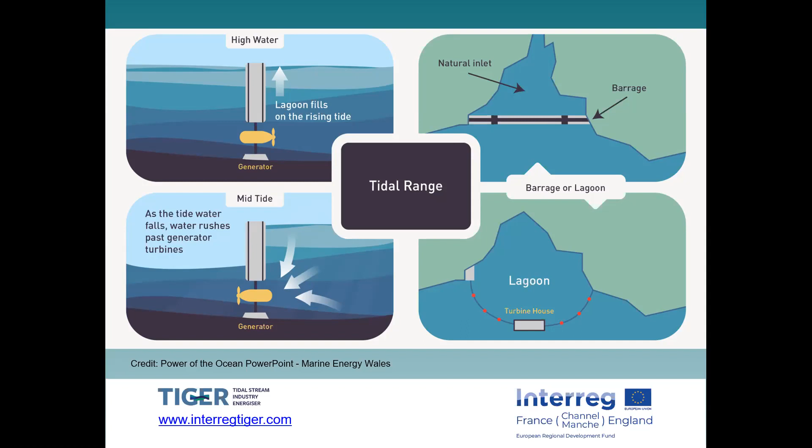So I don't think, given present company, that I need to explain the concept of tides to you. But what I did want to do was just touch on what distinguishes tidal stream from tidal range. As you may be aware, tidal range focuses on the difference between high and low water. You've got technologies such as lagoons and barrages. Examples in the UK being Swansea Lagoon and the Severn Barrage, neither of which went ahead. But they rely on the difference between high water and low water. That's not what we're looking at through Tiger. What we're looking at through Tiger is tidal stream.

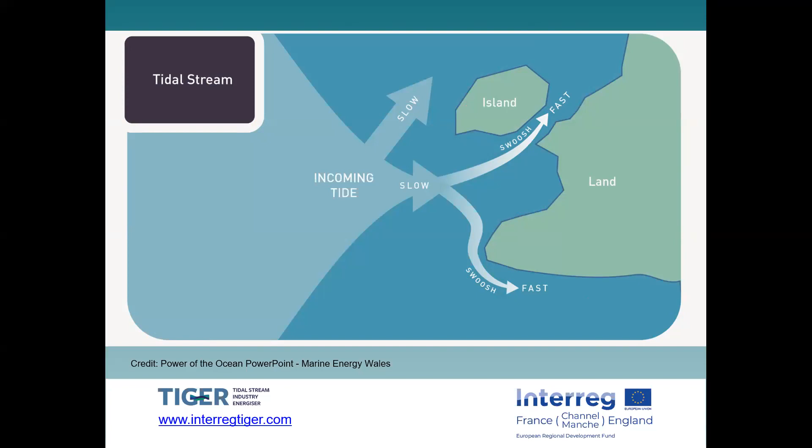As part of Tiger, we wanted to incorporate as many different technologies as possible. That's what we're all about. And tidal being what it is and where the industry is, there's not one single sort of tidal turbine design. There's a few different designs floating around.

On the left there, you can see the concept of a kind of moored floating tidal device. So examples of those would be Magallanes or Orbital, being a partner in Tiger. On the right there, you've got a kind of more traditional wind turbine style tidal turbine, so fixed to the bottom either by piling or gravity anchors. And an example of that would be Simec Atlantis, who are again a partner in Tiger.

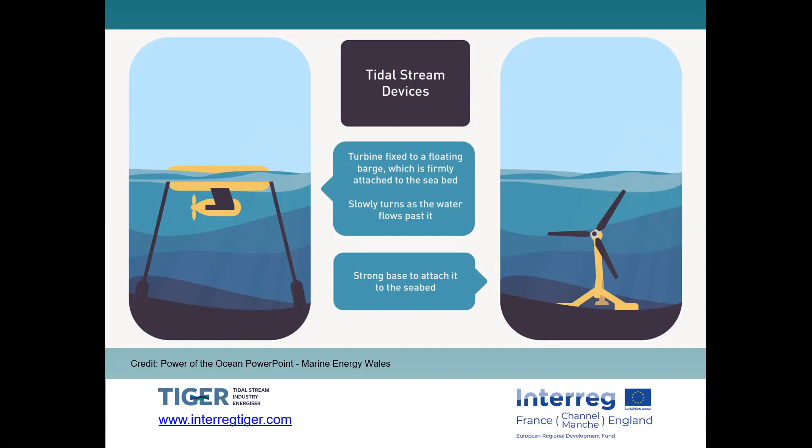And there is a third concept that we're considering, which is the mid-water column tidal kites, which you may have seen, specifically Minesto, Swedish company, also a partner in Tiger. And their device sits some way between the surface and the seabed, and is tethered to the seabed. And it flies in a sort of figure of eight formation, much the same as if you're flying a kite on the beach, and in doing so, it drags a turbine through the tidal flow and generates energy that way.

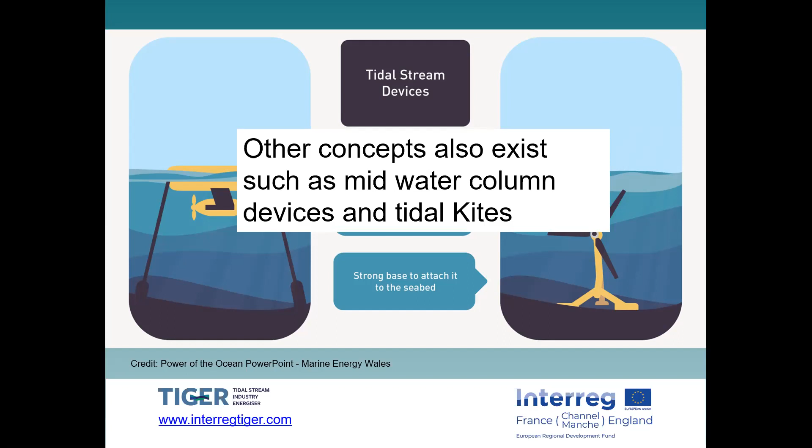So as I said before, Tiger is all about accelerating deployment of tidal stream in the UK and France. And one of the key barriers to deployment at the moment is just the cost, the levelized cost of energy of tidal stream when compared with certainly fixed bottom offshore wind, or the really advanced technologies such as onshore wind and solar. It's just not quite competitive yet. It hasn't benefited from the same government support in the past. So what we're trying to do through Tiger is substantiate some claims that the Catapult made in our 2018 Wave and Tidal Cost Reduction Report.

As you can see in front of you here, there's the current state of the art with 10 megawatts installed as we currently do. We're looking at about £300 per megawatt hour installed. As you come down the cost curve, additional deployment towards 200 megawatts deployed, you reduce costs through learning by doing, you reduce the cost of capital. By the time you're up at 200 megawatts installed, you're looking somewhere in the region of £100 to £150 per megawatt hour. Going further, moving towards 1 gigawatt installed, again, accessing lower cost debt finance, learning by doing. And the hope is that you'll be somewhere around £90 to £100 per megawatt hour installed.

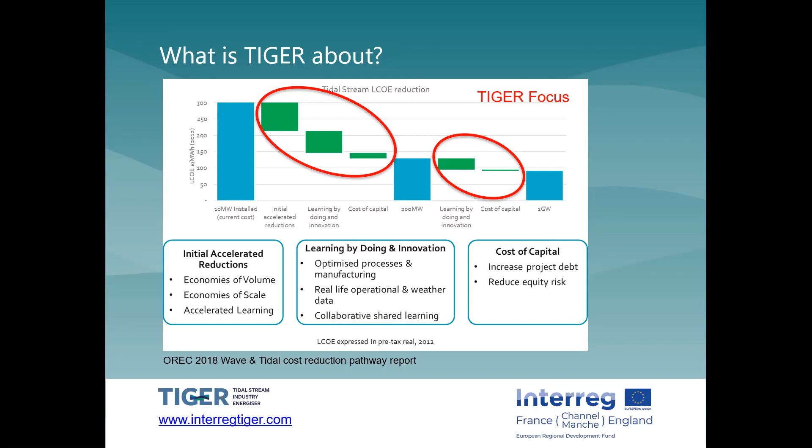So these were claims made in our 2018 report, but they were based on theory. So what we really want to do is put some points under this curve and really prove it in a real seas environment. So through Tiger, we're going to consent new sites. We're going to get some devices in the water in the UK and France, and we're going to analyze all that, put it together, and translate that into some kind of cost reduction figures in a format that can be put in front of policymakers to really prove the point that tidal is ready for a subsidy and can be cost competitive. It just needs that initial kickstart that those other technologies had.

So I touched on it just then, but how we're going to do that. As I said before, we're going to be getting devices in the water. We're going to be looking at technology, and then we're going to be putting it all together. So Tiger is separated into 3 different work packages. Work package 1 is tidal energy site development and deployment. So that's the learning by doing stuff. So getting devices in the water, consenting new sites, understanding really how much does it cost to get these things in the water and operate them and also recover them.

Work package 2 is looking at the development of new technologies and products. So one of our deliverables through that work package is to come up with a range of 46 new products, systems and test specifications. And what we want to do is see how we can drive down costs by increasing commonality of components. So at the moment, developers are largely working in silos. They may well have similar problems, but they're not collaborating. They may well need similar components.

But they just don't know it yet. So the idea is to get them collaborating, identify areas of commonality, and hopefully allow them to access economies of scale, place larger orders, and obviously drive down costs that way.

And then work package 3 is cost reduction analysis. So that's where we're putting together all the data in work packages 1 and 2, and our in-house techno-economic analysts will pull that together and put that into some reports and some nice graphs that can be put in front of politicians and policymakers and say, look, tidal is ready. We're ready to go. We've got all these sites ready. The costs are competitive. We just need your initial support in favor of tidal stream.

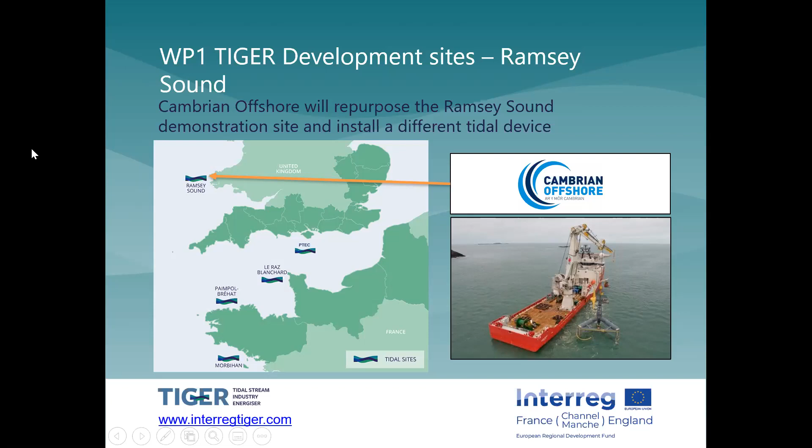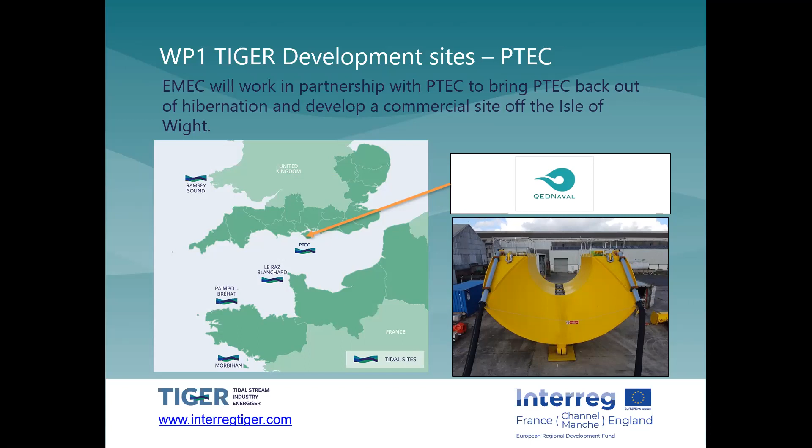And then finally down south in the Raz Blanchard, an area many of you may be familiar with due to its excellent tidal resource. I believe it's certainly the largest tidal resource in Europe. So SIMEC Atlantis and AD Normandie have formed a JV known as Normandie Hydroliennes, and they are looking to consent a new site in the Raz Blanchard. And the unique part of that project, they're actually looking to use the power to sell to the island of Alderney via a private PPA.

Many of you will be familiar with Alderney. Being a small island community, they rely heavily on diesel, and they're looking to do away with that reliance on diesel. And with this enormous tidal resource in their backyard, it makes perfect sense that they should look to tidal. Actually, Danny, who is going to follow on from me, is going to talk a lot more about the Alderney Race. And then the second partner that's looking at the Alderney Race is HydroQuest.

So HydroQuest are going to look to secure consent and develop a 10 megawatt commercial array, also in the Alderney Race. They're two slightly different sites, not far from each other, but they do share some aspects; their consent requires them to share a cable landing. Much of the onshore cable route has to be shared.

So it's really encouraging to see that HydroQuest and SIMEC Atlantis are actually starting to work in collaboration. Despite being competitors, they've realized that the best way to do this is to collaborate for the greater good. And that's really encouraging to see, because it's something that's new for the sector.

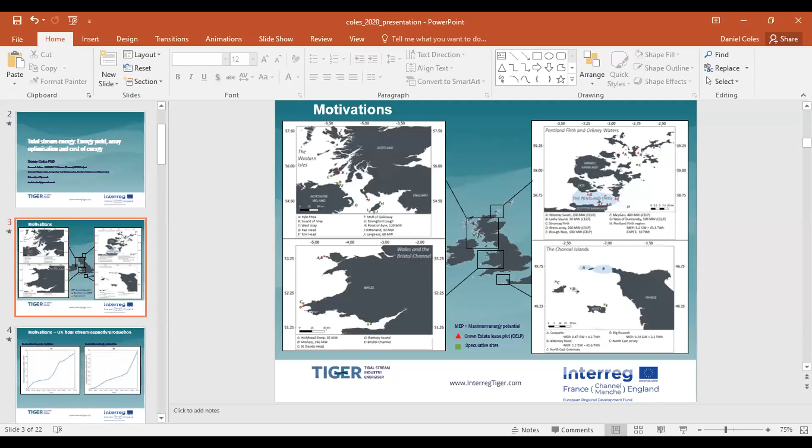Thank you. Okay, thanks very much, Robbie. So Danny will be up next. Robbie, you'll see there's a couple of questions have appeared in the chat. So maybe you could answer those through the chat box while Danny starts giving his talk. Okay. Thank you. Okay, over to you, Danny. Thanks, Steve. Thanks for having me along today. And thanks, Robbie. That was a good introduction.

Hi, everyone. Good afternoon. As Steve said, I'm a research fellow at Plymouth University working on the Tiger project. And today I'll be giving a presentation looking at the energy yield estimates and aspects of array optimization and also cost of energy and how that all feeds into the Tiger project.

So just to give a bit of background to start with, these maps here are highlighting some of the main regions of the UK where there is a tidal stream resource. There's a UK-wide study that was commissioned by the Carbon Trust that concluded that the UK practical resource for tidal stream energy is around 34 terawatt hours, which is equivalent to around 11% of the UK's electricity consumption over a year. And so we have a reasonable level of confidence that there's a significant resource out there that we can harness. And these maps are really trying to highlight that.

I won't be able to go into too much detail on an individual site level, but there are Crown Estate lease plots that have been allocated, especially in the Orkney Waters and Pentland Firth region of Scotland, on the west coast of Scotland and the UK as well. Also got Wales, Anglesey and Ramsey Sound. And then also the Channel Islands, which obviously fits into the Tiger domain of research.

So just a couple of plots here, just to give a bit of context as well. The plot on the left is showing the relationship between time and the cumulative capacity in the UK of tidal stream energy. And you can see that between 2010 and 2019, there's been a significant increase in the capacity that's been installed. Some of that capacity is still operational, such as the MeyGen array up in Scotland and other sites, and some of it's now been decommissioned, having completed testing.

The plot on the right is similarly showing a relationship between time and the cumulative energy production, and we're now at a stage where we've nearly reached 50 gigawatt hours. That energy production is predominantly from the MeyGen array in Scotland, as well as the Orbital device that was installed at EMEC, and they are planning to install a new device at EMEC very soon, and also the SeaGen device that was installed at Strangford Lough and has now been decommissioned.

So this is obviously showing that there's been good progress made, and a lot of that progress has been supported through the ROC subsidy support, which is now no longer available; it's now been changed into the CFD allocation. And we're looking at now trying to provide evidence for further support for tidal energy in order to further develop the industry.

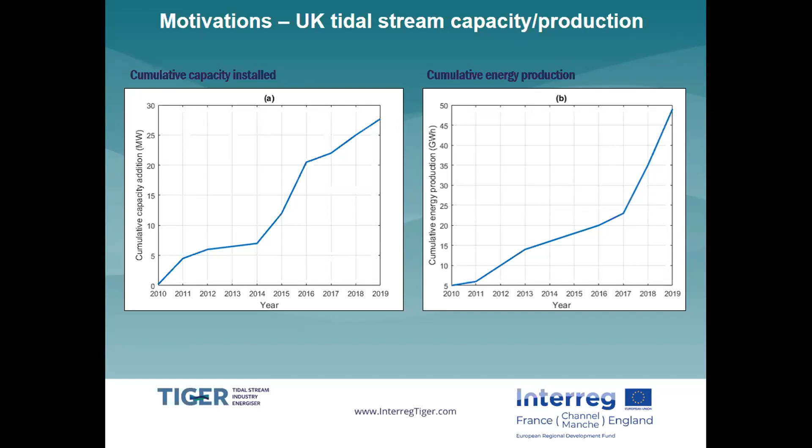So my presentation will focus on the Alderney Race, or Raz Blanchard as it's also known. This map here is just showing an idea of the level of energy, or spatial variation in energy, if you like, around the Channel Islands region. The Alderney Race has been identified as the main site for tidal stream energy development.

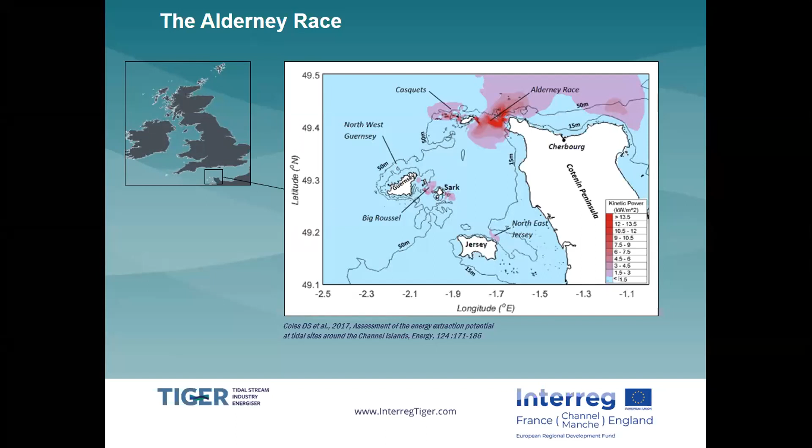Although there are others. There's the Casquets on the west side of Alderney, Northwest Guernsey, Sark, and also Northeast Jersey as well. So there are multiple locations, but most time and effort has been spent at Alderney Race, and will be done so within the TIGER project.

So historically, what I'm going to do with this presentation is give a run through chronologically of how energy yield estimates have developed through time at Alderney Race. This plot here is showing a layout that was considered back in 2004 by the research group at Southampton University. And this layout is really based upon fairly limited data, which was basically the only thing that was available at the time. So it's not a criticism of the research at all, but it was really relying on Admiralty chart data for flow speeds and relatively coarse resolution bathymetry data to try and understand where to locate turbines, but also how big those turbines should be in terms of swept area and rated power as well.

And this study estimated that the annual energy yield from this array, which is a 3.26 gigawatt array, so a very, very large array, is 7.4 terawatt hours, and that's equivalent to a mean power of about 0.8 gigawatts, or 2.4% of UK electricity consumption on an annual basis. And the research that I've carried out is really trying to understand what is the accuracy of this estimate, given the drawbacks in terms of resolution of flow data and bathymetry data.

And also it's important to state that this study doesn't consider the blockage effect of the array, where adding turbines within Alderney Race is going to block the race up and potentially divert flow around Alderney Race and into that Casquets area that I showed on a previous map.

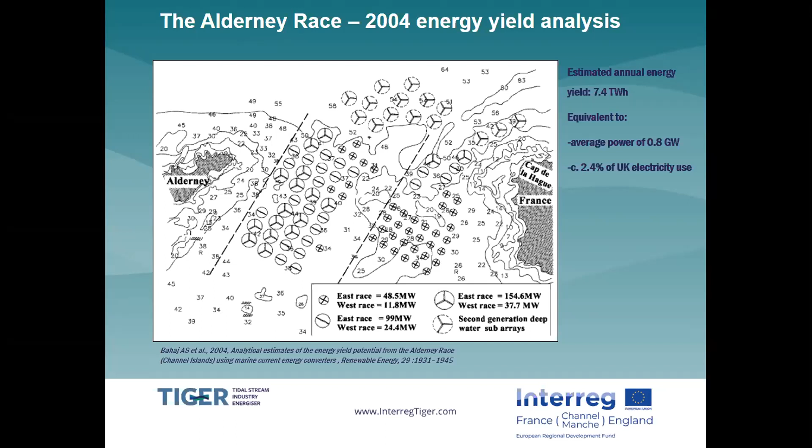So this is an example of the work that's been carried out since. The plot on the top left is showing the same array layout that I showed on the previous slide. The contours on that plot are depth, so bathymetry. So what we've done is we've modeled the tidal resource within Alderney Race using a program called Telemac 2D. And some of the outputs from that model are shown on the top right panel.

And the color scheme is really showing in what regions of the race the flow speeds are increasing versus the ambient flow when you don't have turbines within the resource, and in which regions they are reducing. So you can see the green and blue regions where the turbines are located. You see this significant reduction in flow speeds, and then you also see a significant increase in flow speeds in between the two arrays and also on the flanks of the arrays either side of the race.

And so what this is really highlighting is that blockage is a very important thing to consider when carrying out energy yield estimates, because the flow speeds are reduced significantly at the locations of the turbines. And for that reason, you really need to run these sorts of simulations in order to estimate energy yield with any confidence. The plots below are showing a time averaged representation of how the flow speed changes versus the ambient flow over a spring neap tide, and again at peak flood and peak ebb tide. So it's again showing that significant increase and reduction in flow speeds that you see across the race.

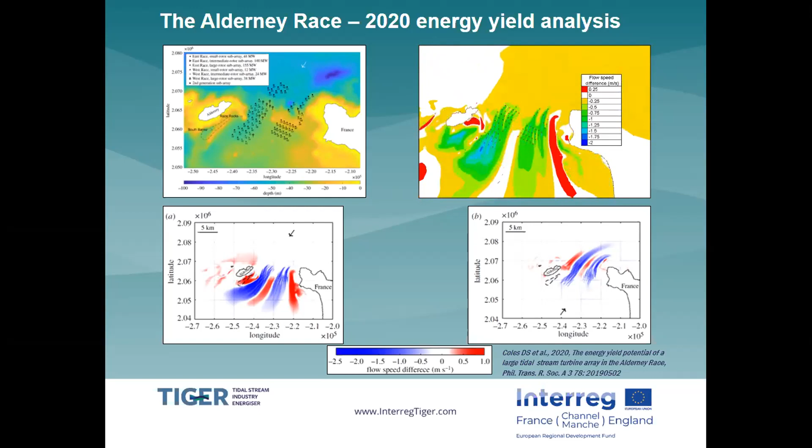So why is that important? Well, power that's produced by a tidal turbine is proportional to the flow speed cubed, and it's also proportional to the swept area. So if you're getting these big reductions in flow speed at the locations of the turbines, then your power is going to reduce significantly. The swept area is also important. As I mentioned, in that 2004 study the swept area of the rotors was selected based on fairly limited bathymetry data. And I'll show in a future slide that in a lot of cases an inappropriate swept area was chosen. So we could potentially maximize power by having better bathymetry data to understand the spatial variation in depth.

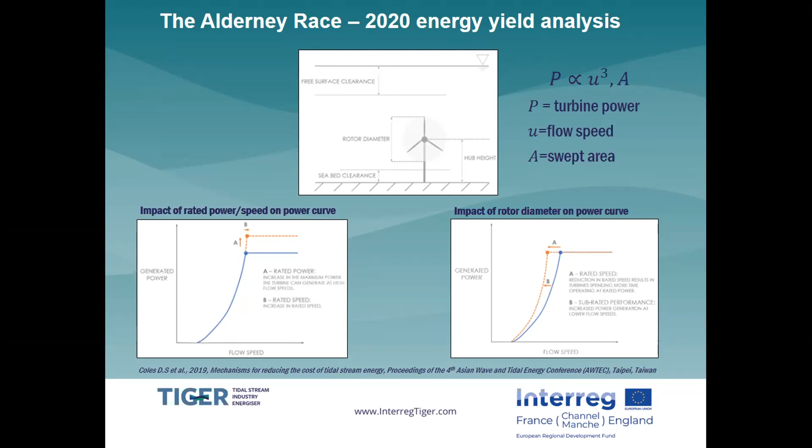So what we did with the updated study is we looked to add detail to the model incrementally and see how that affected the energy yield, or estimated energy yield, should I say, of the array. So case one in this slide is the study done back in 2004. So as mentioned, it had a relatively coarse flow resolution and bathymetry resolution. It didn't consider array blockage. It used a power coefficient of 0.3 to estimate power.

And what we did in case two is we improved that using the flow simulation that I showed. And so we increased the flow resolution to around 250 meters. So that was the only change we made to start with. And we saw that the energy yield reduced from 7.4 terawatt hours to 6 terawatt hours. In case three, we added further detail by including the array blockage that I alluded to with the flow simulations. And that, as you'd expect, shows a significant reduction in estimated energy yield from 6 terawatt hours to 2.3 terawatt hours.

Case four, we actually updated the power coefficient because we now have better understanding of how the turbines are performing at real sites, such as MeyGen, who have issued a lessons learned report that has this updated figure of power coefficient of 0.41. So that increases the energy yield from case three to 3.2 terawatt hours. And then finally, we actually looked at reducing the array capacity, because what was happening was that there was so much blockage that the turbines weren't even reaching their rated speed. And so we could maintain the same level of energy yield of 3.2 terawatt hours, but using a much smaller or less engineered, if you like, array of turbines.

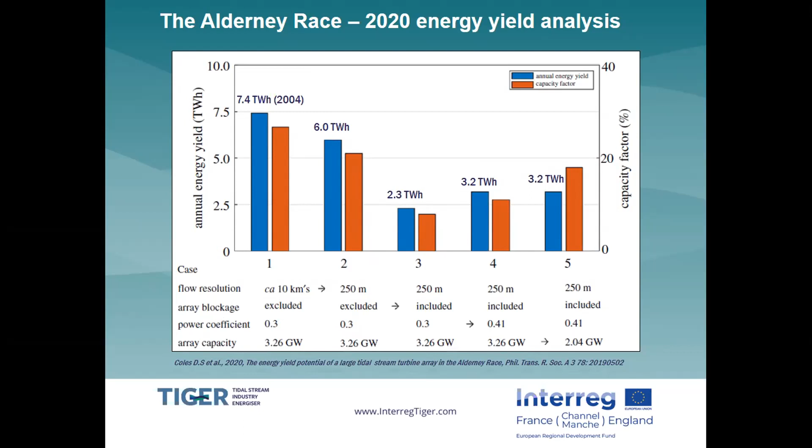So, as I said, this work has identified further array improvements. So the plot on the left here is showing the time averaged flow speed across the Alderney Race. And as you can see, the yellow regions are the regions of highest flow. And as you can see, the turbines, in some cases, are not located in those highest energy regions. And that's as a result, as I mentioned, of only having low resolution flow data initially back in 2004 when this array was designed. Another aspect, as I've already alluded to, is the rotor diameter.

And so the plot on the right is showing for each sub-array within this array, which is shown for each point on the left-hand side, the rotor diameter can be increased. So the blue bars are showing the maximum rotor diameter that would be allowable at each location. And the orange lines are showing the rotor diameter that was actually used in the study. So in most cases, okay, there are some exceptions where rotor diameter actually has to reduce, but in most cases, the rotor diameter could increase, and significantly.

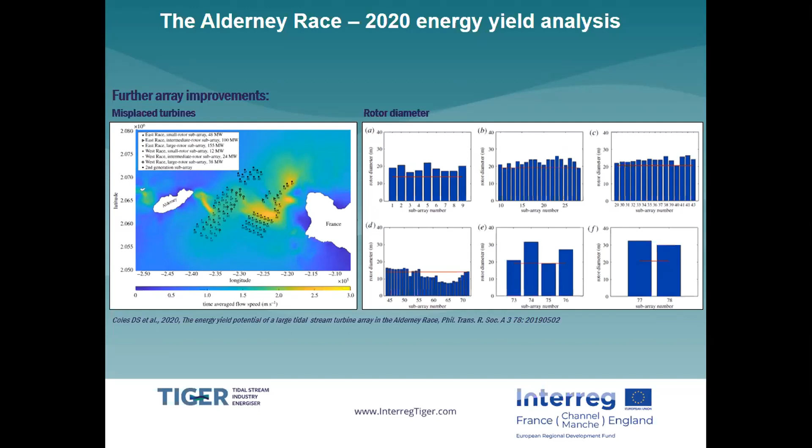And we've calculated that would lead to an increase in total swept area of the array of about 30%. And so you'd expect to see maybe similar levels, at least in magnitude, of energy yield uplift as a result of that, assuming blockage doesn't impact on things too much. So, okay, that's sort of as far as we can go with that sort of approach to array design. But what we're doing now is we're taking that further by looking at array optimization. And what I mean by that really is a method where we can link the hydrodynamics, and how the hydrodynamics change as a result of putting turbines in the water, to the optimal array design.

And that's really the motivation for this new work that we're carrying out now. And what we're looking at doing is implementing gradient-based optimization within site-specific hydrodynamic models. And this has been developed through software packages such as OpenTidalFarm and Thetis, both developed at Imperial College London.

And the summary of this approach really is that you start with an initial idea of what the array might look like in terms of number of turbines or spatial variation. And then you go through an iterative process. So you basically carry out a simulation that solves the shallow water equations to look at what impacts the turbine has on the flow field and what power could be generated from that array. And then look at an optimization where you carry out the adjoint equations in order to estimate a profit gradient.

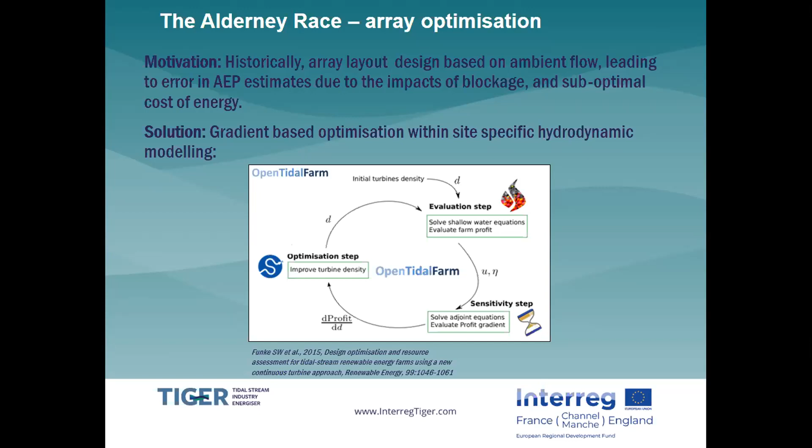And what this ultimately does is look at ways of improving the array performance through changes to the array design. What we're looking at the moment is focused mainly on the location of turbines within a site. But there are other aspects that you could optimize for as well, and I'll go into that in a future slide. But once you've carried out that step, you can recalculate the energy yield of the array and the impacts that array has on the flow dynamics and the blockage, and then carry out that iterative process until you come across a converged optimal solution.

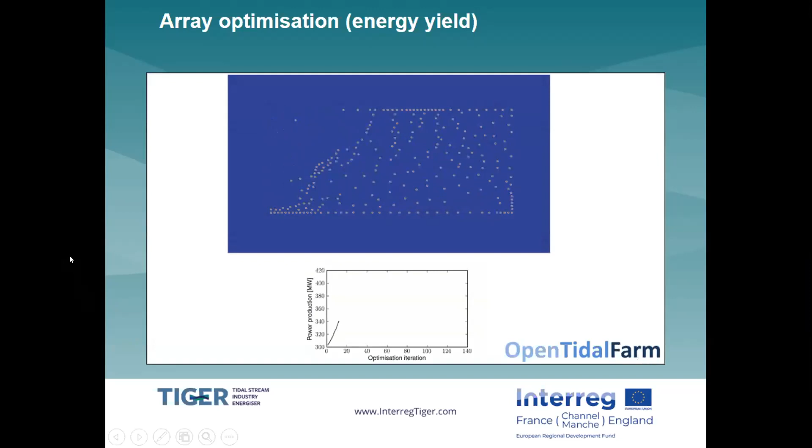So I can demonstrate this in this video. On the top here, we've got a regular array of turbines. And the flow is going to come from left to right, although the flow field won't actually be shown. On the bottom here, we've got a plot that shows the relationship between the iteration within the optimization and the power production. And if I just play this through, what you'll see is that as the array is optimized and as the turbines move within the optimization, we see a significant increase in power production. We're going from 300 megawatts as a mean power up to 400 megawatts, so a 30% increase in power production as a result of optimizing the array.

So this is obviously very important in that we're better harnessing the available resource. It will lead to significant cost reduction, as I'll go into in a future slide. And this obviously ties in well with the aims of the Tiger project.

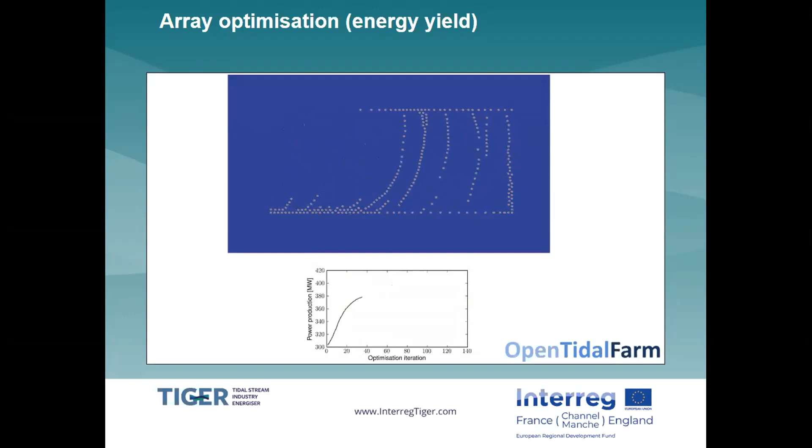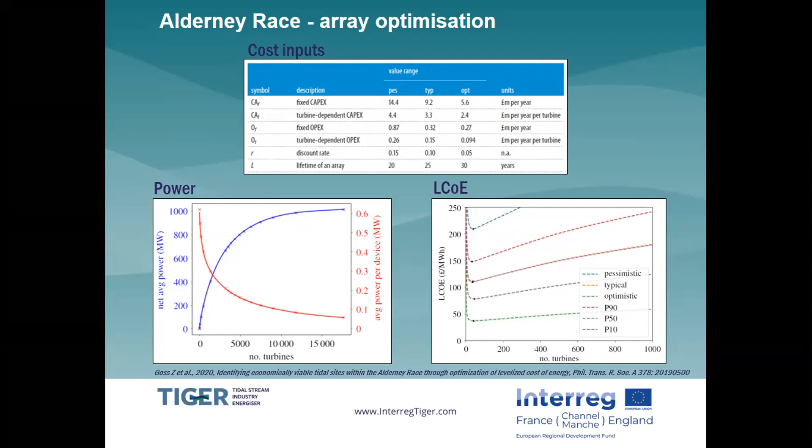The results show that for an 80 megawatt array in the East Race of Alderney Race, we're looking at, based on typical CapEx and OpEx figures, an LCOE of around about 110 per megawatt hour. Again, these are figures based on CapEx and OpEx figures published in literature, and we're now looking at trying to validate those numbers. And so there's a bit still to do there.

And finally, the Monte Carlo analysis that we've done is significantly reducing that level of uncertainty in LCOE. However, again, there's still work to be done there to further reduce that uncertainty within acceptable bounds. The further work that we're now looking at doing is looking, as I said, to reduce that level of uncertainty.

We are looking to optimize turbine design, not only to consider LCOE, but also looking at multi-objective optimization to also minimize environmental impact, which, as I mentioned at the top of this talk, is another big uncertainty that is driving the uncertainty in the practical yield that we can achieve. And we also want to improve the spatial resolution within the Alderney Race in terms of the modeling work as well. And we also want to apply this work to the other locations within the TIGER project.